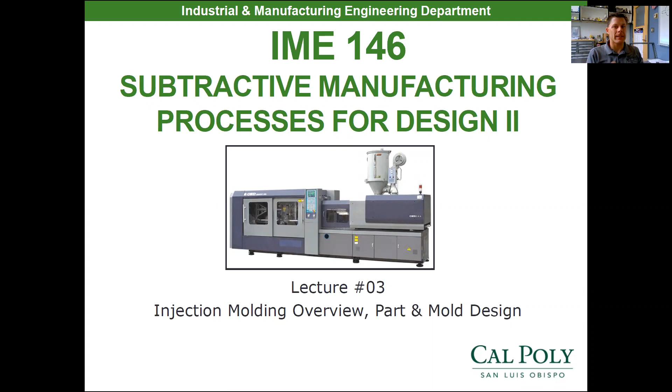This week, we're going to talk all about injection molding and how parts are designed and molds are designed. So injection molding is the most popular way to fabricate plastics or polymers. Materials engineers get upset when I call them plastics.

So out there, really, there's 3 different types of polymers, and really the determination of the manufacturing process depends on that type of polymer. So we're going to deal with thermoplastics with injection molding. What thermoplastics do is they heat up to produce a nice soft, formable, solid, or liquid when we're actually injecting them. Now, a thermoplastic can be remelted over and over.

So what can happen is I can go ahead and reuse some of the material from my gating system in my previous mold. I can chop it up. It's called regrind. And I can add the regrind material back into my virgin material and end up basically being able to reuse my plastics, because thermoplastics can be remelted over and over.

Now that's a little bit different than thermoset plastics. Thermoset plastics have a catalytic reaction occur when they're being polymerized, and the polymers cross-link when they're actually polymerized, and they cannot remelt. So thermoset polymers burn or char if you apply heat to them after they've actually been polymerized. So a bowling ball would be an example of a thermoset. You can't remelt the bowling ball, you'll just char it.

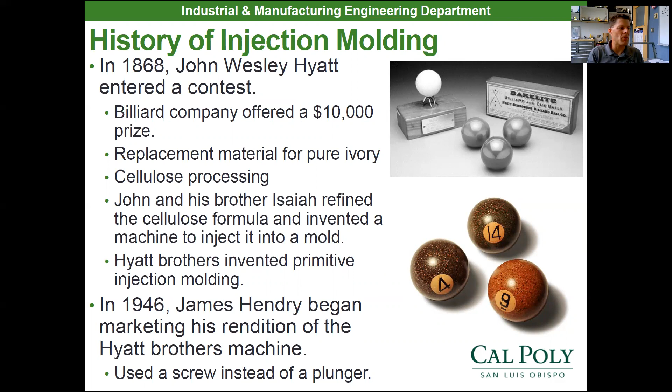So James Hendry began marketing his rendition of the Hyatt brothers' injection molding machine, which used a screw to deliver the material instead of a plunger. And modern day injection molding machines now look a lot like James Hendry's machine. I mentioned injection molding exploded in World War II. So they were coming up with new polymer materials for the process and new styles of parts that they could injection mold.

Now, it seems like wartime stimulated a lot of innovation in manufacturing, to be honest with you. So what happened is they had a new process now, and they were coming up with new polymers, and the industry started to blossom or explode. So this video I'm going to first show you right here talks a little bit about injection molding, and then we're going to get into the different details of the process and learn about part design and how the whole process kind of works. So let's watch the engineer guy talk a little bit about injection molding.

Injection molding is the most common method for mass manufacturing plastic products. Examples include chairs, toys, cases for consumer electronics, disposable cutlery, and my favorite, Lego bricks. Injection molding was invented to solve a problem for billiards. In the 19th century, billiard balls were composed of ivory harvested from the tusks of African elephants. This devastated the elephant population, so a billiards manufacturer offered a $10,000 prize for a replacement for ivory.

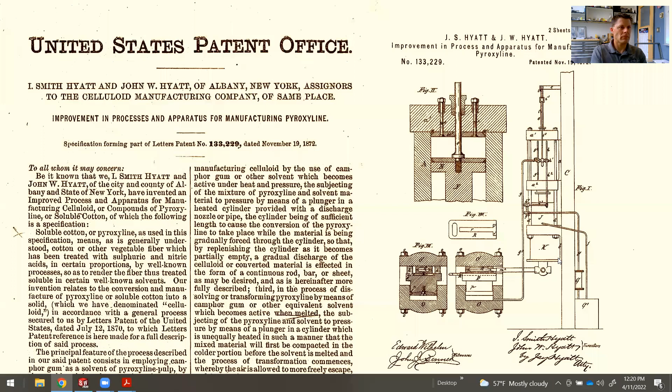And this spurred John Wesley Hyatt to develop one of the first plastics, celluloid, to create billiard balls. He patented an apparatus for molding products from celluloid. This apparatus was the birth of plastic injection molding. In principle, injection molding is simple. Melt plastic, inject it into a mold, let it cool, and then out pops a plastic product. In reality, injection molding is an intricate and complex process.

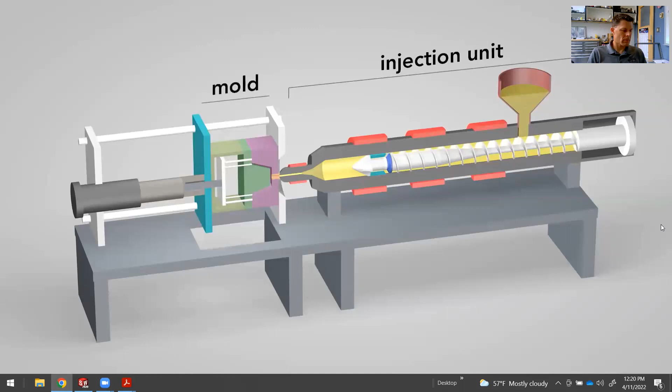An injection molding machine has three main parts: the injection unit, the mold, and the clamp. Plastic pellets in the hopper feed into the barrel of the injection unit. Inside the barrel, a screw transports the pellets forward. Heater bands wrapped around the barrel warm up the plastic pellets. As the pellets are moved forward by the screw, they gradually melt and are entirely molten by the time they reach the front of the barrel.

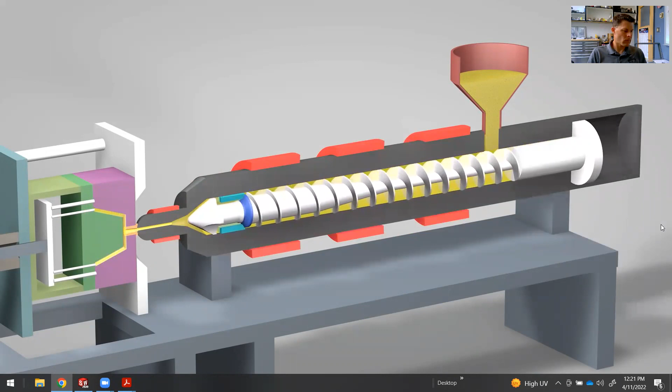Once enough molten plastic is in front of the screw, it rams forward like the plunger of a syringe. In a matter of seconds, the screw injects the molten plastic into the empty part of the mold called the cavity image. The plastic solidifies in under a minute. The mold opens and the part is ejected. The mold then closes and the process repeats. All injection molded objects start with these plastic pellets, which are a few millimeters in diameter. They can be mixed with small amounts of pigment called colorant, or with up to 15% recycled material, then fed into the injection molding machine.

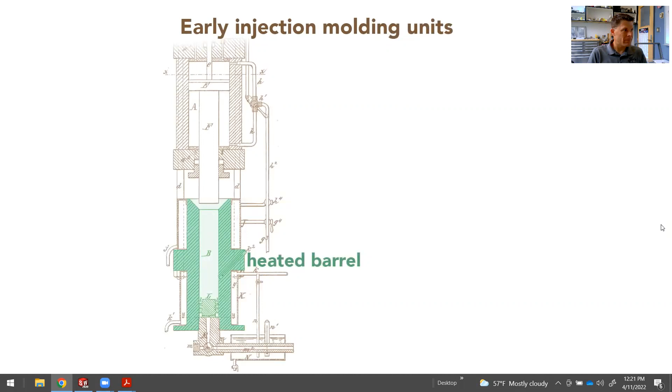Before the mid-20th century, injection molding machines used only external heating of the barrel to melt the plastic before a plunger injected the molten material. But because plastic conducts heat poorly, the temperature was uneven in the barrel. Either the middle was too cool and not fully melted, or the outer regions were too hot and degraded the plastic. The solution was this: the reciprocating screw, often regarded as the most important contribution that revolutionized the plastics industry in the 20th century. In the earlier plunger-style machines, plastic filled completely the cylindrical barrel. But as I showed you, the plastic was not at a uniform temperature.

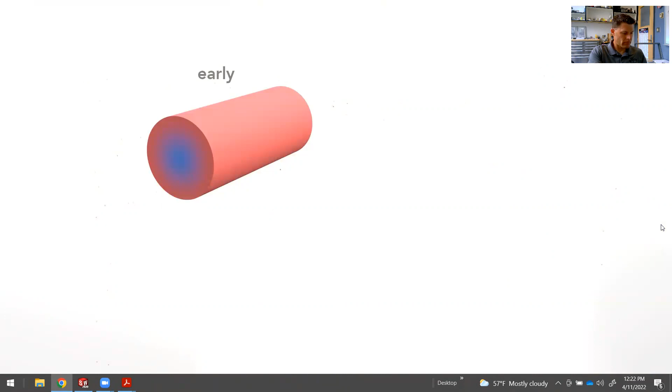The reciprocating screw overcomes this in three ways. First, in modern units, the plastic fills only the space around the shaft of the screw. This eliminates the cooler central region, leaving a thinner, evenly heated layer of plastic. Second, the screw has flights that wrap around the shaft. As the screw rotates, the flights transport the raw material forward through the barrel. The flights also serve to mix the plastic. The screw action agitates the melting pellets within the flights to create a uniform mixture.

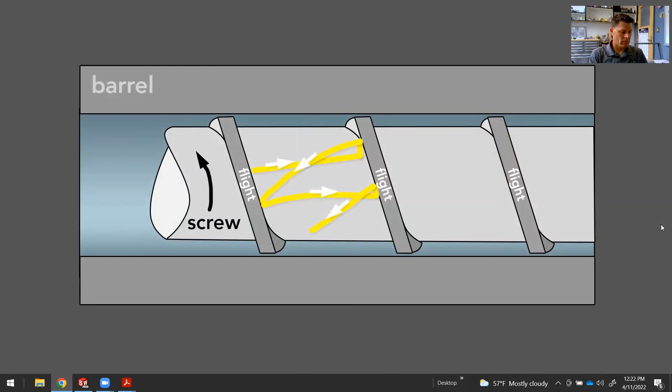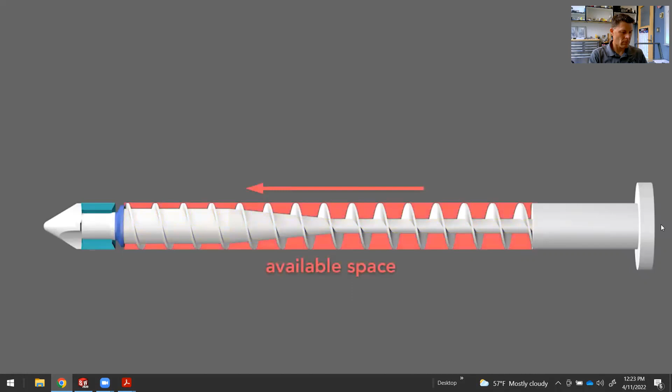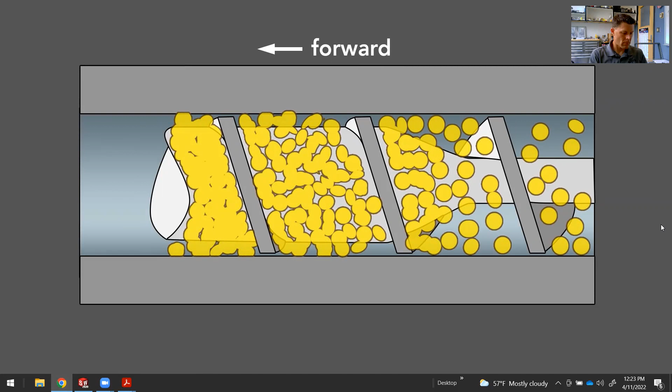And third, the screw action itself heats the plastic throughout. The shaft's diameter increases along the screw so that the distance between the wall and shaft decreases. The flights then squeeze out air as they move the plastic forward, and they shear the pellets and press them against the barrel's wall. This shearing creates friction and so heats the plastic throughout. This screw-induced shear supplies a majority of the heat needed to melt the plastic, between 60 and 90%, with the rest from the heater bands.

The molten plastic flows past the front of the screw through indentations or flutes. When there's enough plastic to fill the mold at the front of the screw, it rams forward like a plunger, injecting the plastic into the mold. The plastic cannot flow backwards because when the screw pushes forward, a check ring is shoved against a thrust ring to block the backwards movement of the molten plastic. This forces the plastic into the mold. Initially, the cavity image is filled with air. As the molten plastic is injected, it forces air out of the mold, which escapes through vents.

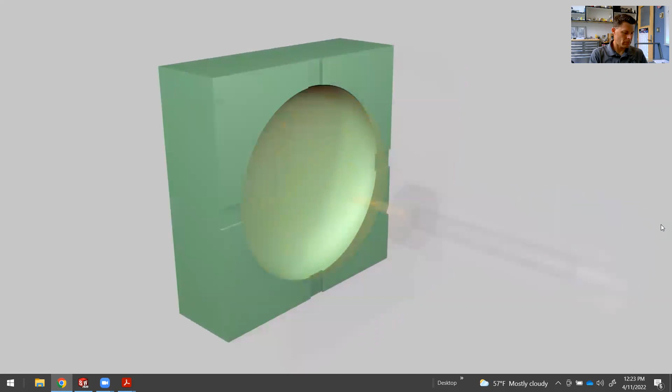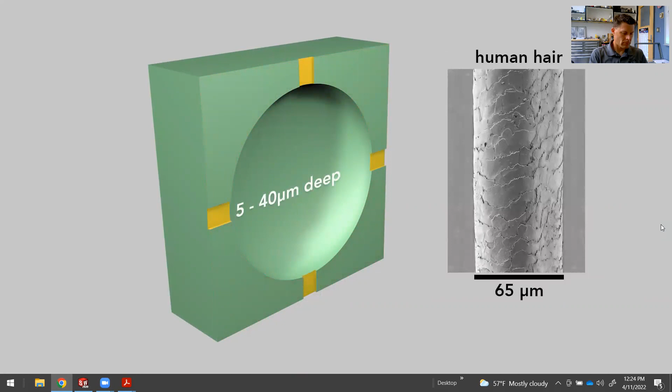These vents are channels ground into the landing surface of the mold. They're very shallow, between 5 and 40 microns deep. The plastic, which has the consistency of warm honey, is too viscous to flow through the narrow vents. To speed the plastic solidification, coolant, typically water, flows through channels inside the mold just beneath the surface of the interior.

After the injected part solidifies, the mold opens. As the mold opens, the volume increases without introducing air, which creates tremendous suction that holds the mold together. So at first, the mold slowly opens several millimeters to allow air to rush in and break the vacuum, and then the mold quickly opens the rest of the way so the part can be removed. These precision machined steel molds can cost hundreds of thousands of dollars.

Removing the part from the mold can be difficult. When the plastic cools, it shrinks and so becomes stuck tightly on the core half of the mold. Molds have built-in ejector pins that push the part off the mold. The ends of the pins sit flush with the core half of the mold, but are not perfectly aligned. Sometimes they protrude or are indented slightly. So, if you look closely, you will see circular ejector pin witness marks on molded products. For example, this chair, on its bottom, has an array of witness marks.

When the part drops from the mold, an operator has to remove the sprue, that section of plastic that connected the injection unit to the mold. Sprues are manually twisted or cut off the part. Sprues are attached to objects only in molds that make a single part at a time, like a chair. Smaller objects are made in multiples in a single mold.

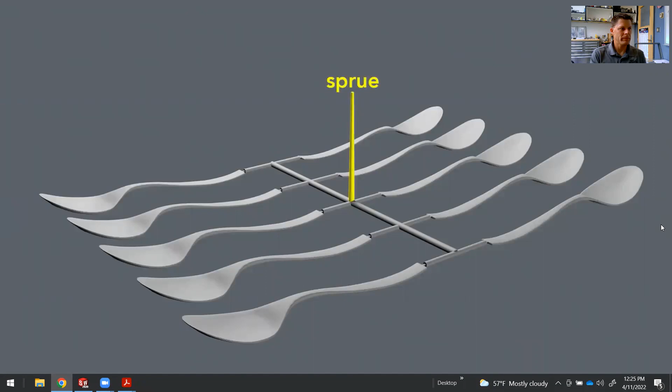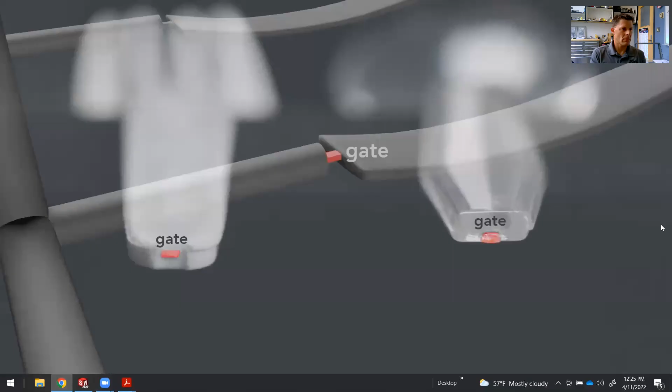In these, the sprue connects not to the part itself, but to a network of distribution tunnels called runners. The runners fan out from the sprue and connect to each cavity in the mold via a small, typically rectangular, entrance called the gate. You can see the gate on plastic cutlery. The parts for model planes typically come still attached to their runners.

Molds always have at least two parts, and where the parts of the mold meet is called the parting line. Here on this piece of cutlery, you see the parting line along the side of the fork. When mold halves close, they are never perfectly aligned, nor do they have sharp corners. This creates a noticeable parting line on the molded object.

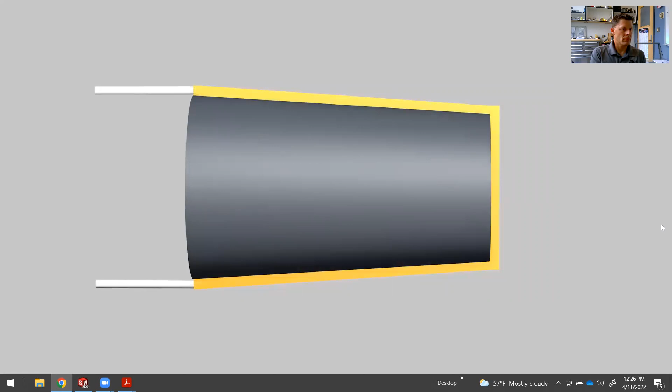Another very important aspect of mold design is the draft angle. If a part has walls that are exactly 90 degrees, it will be very difficult to eject because its inner walls will scrape the core half of the mold. Also, the vacuum will be difficult to break because air cannot readily enter. However, if the walls are slightly tapered, even just 1 or 2 degrees, it becomes much easier for the part to be removed because once the part moves slightly, the walls are no longer in contact with the core half and air can rush in.

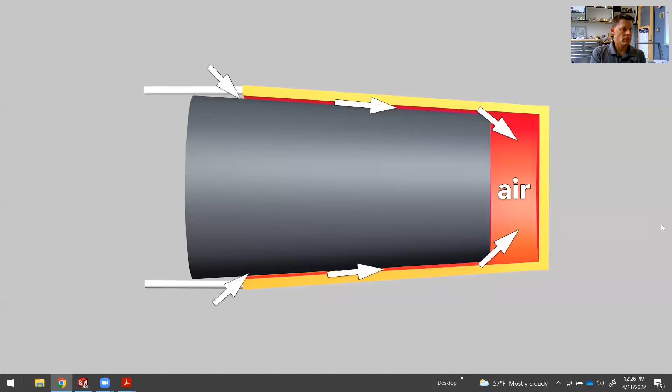One impressive example of injection molding is the Lego brick. You can see the injection point in the middle of a stud, but this is not from a gate or a sprue. The Lego molds use hot runners. Hot runners are a heated distribution network. This keeps plastic inside the runners molten while the plastic in the mold solidifies. This leaves no gates or sprues to be removed. The molded bricks are ejected, ready to use. The downside is that this setup is more expensive than a traditional cold runner system.

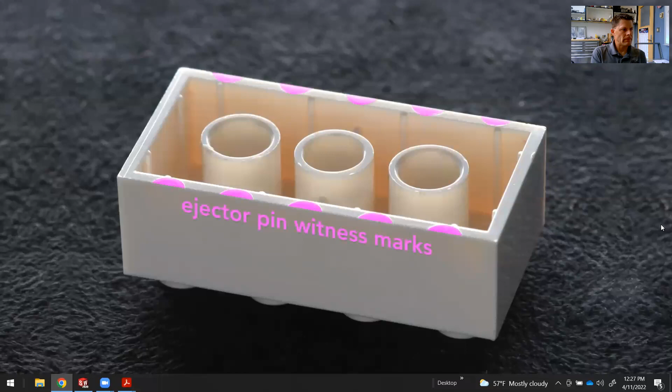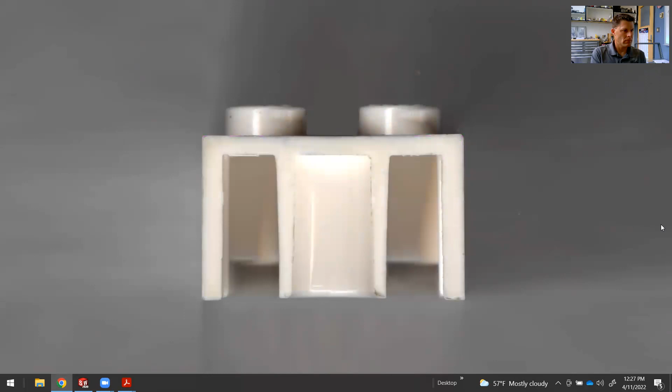On the bottom edge of the brick, you can see ejector pin witness marks. And what's most clever to me is where Lego designs their draft angle. The outside of a Lego brick must be square. So if you cut a Lego brick in half, you can see that these inner supports are thicker at the top than at the bottom. There's a draft angle of about 1.5 degrees. This helps the ejector pins push the brick off the mold. The core half and the cavity half of Lego molds are designed so that the parting line is at the bottom edge of the brick. This hides the parting line.

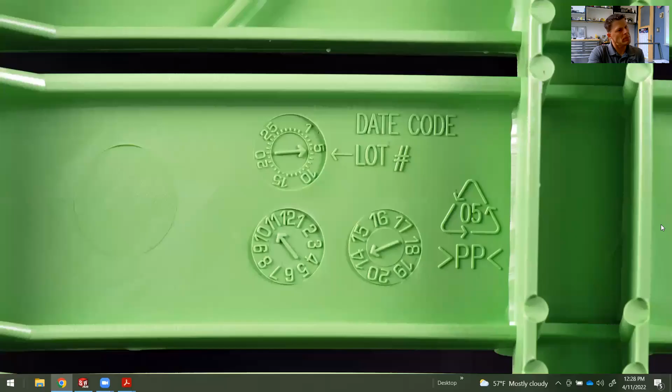Look around you and see how many injection molded objects you can find. Likely the device you're watching this on has injection molded parts. You should be able to find ejector pin witness marks and parting lines, but you may find something like this. It's a date wheel that shows the month and year the item was made. These are created by removable inserts and can be changed out for each run of the mold. They're very useful for tracking down defects.

So to return to where this all started, John Wesley Hyatt and his injection molded billiard ball did not win the $10,000 prize. His celluloid billiard balls didn't bounce quite right. But he did pioneer plastic injection molding, a thriving, continually evolving manufacturing process which creates many billions of products every year.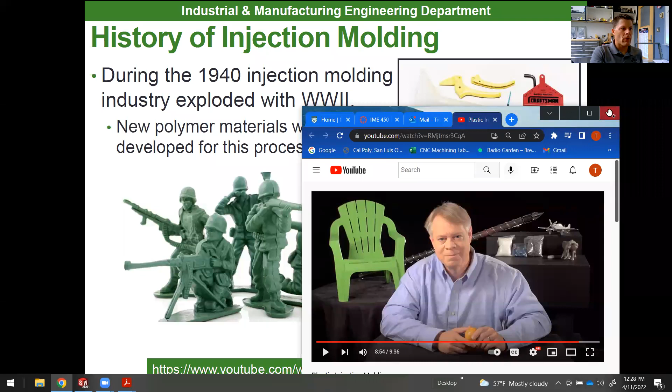All right, so I thought that was a really good overview of injection molding. If you think about it, a lot of different products out there are injection molded. So it's the most popular process for manufacturing thermoplastics. That's why we're talking about it in IME 146.

And that injection mold has been machined. So we're going to talk about some advanced machining processes starting next week, like electrical discharge machining, electrochemical machining. But these advanced machining processes allow us to produce intricate details for molds. And we'll see how those work a little bit next week. But for this week, we're going to focus strictly on injection molding.

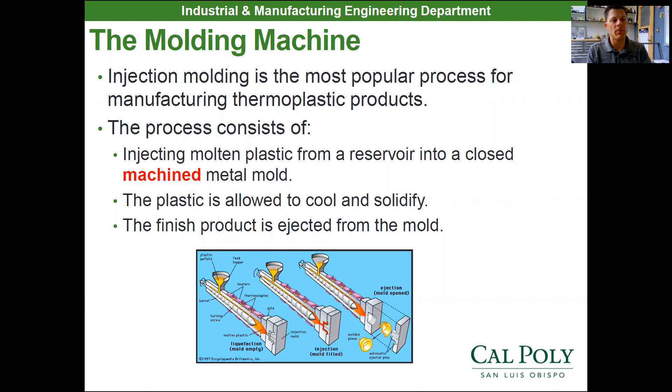So once that mold comes shut and we inject polymer or plastic into it, it solidifies, and then the molds open up and the product's ejected from the mold automatically. Most injection molding machines run automatically, so the parts are automatically placed in the bucket after molding. Our injection molding machine is like you see right up here on this slide.

It's called a Morgan press. Its retail value is about $15,000 if we were to buy a brand new one. And the Morgan press uses a cylinder and a piston to inject. So it's like the original Hyatt Brothers machine that you saw in that original patent. We're not using a screw to deliver the material. We're using a big plunger.

So our machine isn't made for high volume production. It's not made for automatic molding. It's made for more prototypes or smaller parts, where you're not going to be producing 10,000 of the same part. You may be producing 50 or 100 parts, smaller production runs, smaller molds.

And what we're going to be making are these Geneva handles like you see right here. And then we're going to drill and tap them and see what the runout is on our Geneva handles. So a little bit of injection molding, a little bit of GD&T this week, some drilling and tapping, some fun stuff coming up in lab.

But let's look at this Morgan press machine right here. You're going to see all the controls are on the bottom. The bottom's got clamp control and injection control. So there's really two main features on an injection molding machine. The clamp, which clamps the mold together, and that clamp has to withstand the injection pressure.

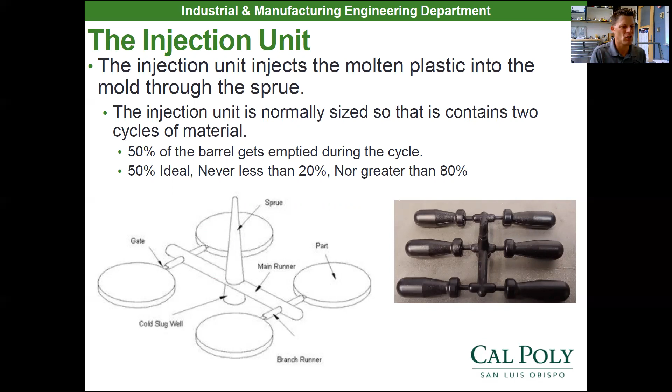Now, that injection unit has a couple of different pieces that go in there. In a real machine, you have a barrel, which is part of your injection unit. The barrel has a reciprocating screw in it and different electric heater bands to melt that material. It's composed of a tool steel liner, and then it has either a screw or a plunger going down the center. The press we're using has just a pneumatic plunger, so we have basically a large pneumatic piston that pushes down on the melted plastic and injects it into the actual cavity of the mold.

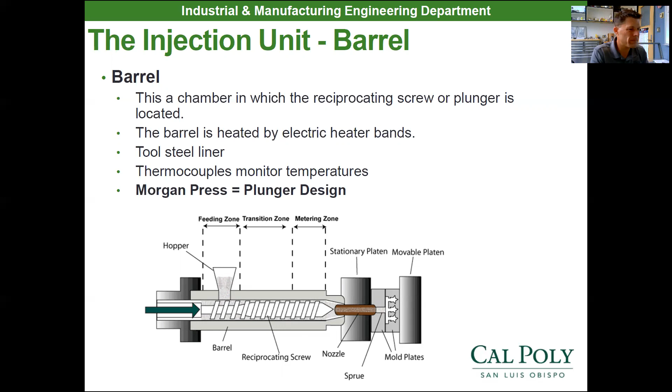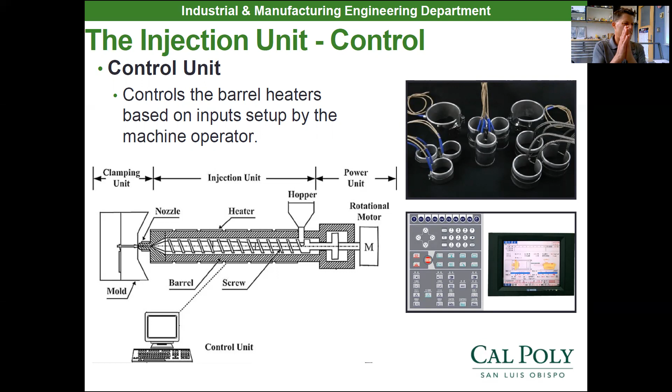Now, there's a control unit or a computer system that looks at something called a thermocouple. A thermocouple senses temperature. So the thermocouples in the heater bands and the control system allow it to turn on and off and stay at a specific temperature that's really close to the melting temperature of the material. Because remember, it doesn't actually melt till it gets to the nozzle. So the control unit keeps the barrel at the correct temperature, and it allows you to open and close the press during the cycle.

Now, the hopper is where you keep the plastic or polymer pellets. So thermoplastic material is loaded into the hopper. Now, materials like nylon really like to absorb water. So there's a lot of polymers out there that absorb moisture from the air.

And the problem is when we get the moisture from the air absorbed into our material, we heat our material up above 220 degrees Fahrenheit. So water at 212 degrees Fahrenheit turns into steam, right? And if we have any type of steam, it's going to be trying to expand in our barrel, and we're going to have some issues. So if you hear any hissing or popping out of your injection molder, you probably have some steam going on there, and it's not going to give you desirable results.

So real production injection molding machines have a dryer on the hopper in order to always basically aerate or dry out the material as it's sitting there in that hopper, so we can get rid of that moisture. What we do is we put it in the oven at 225 degrees Fahrenheit and let it bake, and that bakes the moisture off of our material. Then we can go out there to lab and basically spoon it into our actual hopper in our machine. So dryers remove the moisture absorbed in the actual polymer materials.

Now, the injection unit is a screw on most machines. And so it goes from that hopper down into the screw. It gets fed into the backside of that screw, into the feeding zone. The transition zone starts to compress the material, giving it a little bit of shear. There's some shear stresses going on in there as we're compressing the material, and that's creating heat as well. So in that transition in the metering zone, we're using the frictional shear force to heat it up along with those heater bands. And then right at that nozzle, it should melt and inject right into your actual cavity of your mold.

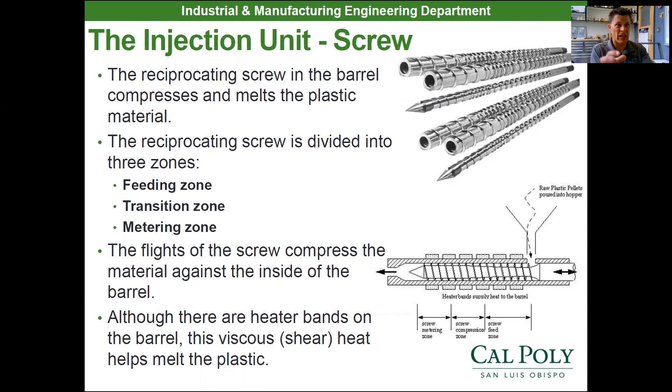Now, most injection molding machines have a spherical radius for their bushing. So looking right out here on my mold, that's a spherical radius. So it's a radius in the form of a sphere. There's a hole, so it goes down into the actual cavity of the mold. Let me show you the mold here. Open that back up. So you can see on the opposite side of that sprue bushing is the actual reverse taper sprue that'll feed the mold, and then the gates and the runners right there.

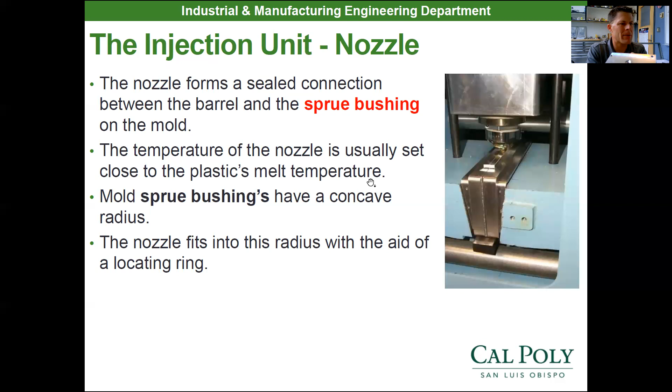So the nozzle comes in and attaches itself to the top of the mold. Pressure's placed on that. It's got that concave radius, and it doesn't allow plastic to leak out. This way it goes out down into the actual mold, the path of least resistance right there. So the nozzle fits into that radius with the aid of a simple locating ring.

Now, once the mold's together and clamped and the nozzle's up to it, you have to set the injection pressure on the machine. Injection pressure is really rated off of how viscous is your material and how big of a cavity do I have to fill. Do I have to fill a large cavity? Do I have to fill a really thin cavity? What do I got? Do I have a lot of passageways that might need a little bit higher temperature and higher pressure in order to fill them? Just really depends. So our press has 12,000 PSI max injection pressure.

And to be honest with you, we're running 6,000 PSI. So we have 60 PSI injection pressure right there, which is proportional based off the machine's 12,000 PSI. So we're running about 6,000 PSI injection pressure, just so you know.

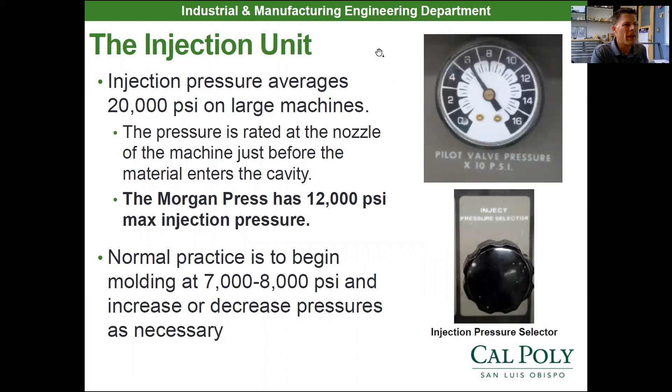Normal practice is to begin molding around 7,000 or 8,000 PSI, and you decrease or increase based off your results on what's filling in the mold right there. Is the mold filling or is it not filling? If it's fully filling, you can keep decreasing till it doesn't, and then add a little bit more pressure so it fills again. But that's what the injection unit does. So you have a little needle control valve down there that you twist, that adjusts how much injection pressure we actually have.

But when in doubt, don't ever max it out, because you can actually hurt the molds by clamping them too much. So you want to match your injection pressure and your clamping force so that your injection pressure doesn't spread out your molds when you inject.

So that's all it really is there, to keep it together. So you have one nice congruent mold cavity that's together. It doesn't want to spread apart when you add that 8,000 PSI or 6,000 PSI into the cavity there. So that's what the clamping unit does.

Now, materials are classified by their flow. There's high flow, average flow, and low flow materials. It's basically a number 5 to 20, where 5 flows the lowest, and 20 would flow like water, or close to that. So based off the amount of flow, you might have to give it a little bit more clamping pressure when we have low flow materials.

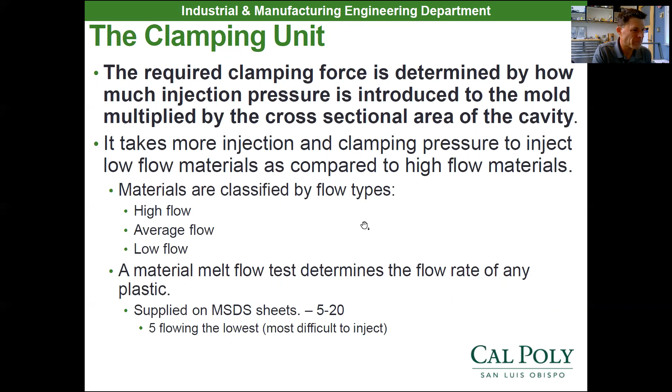Now, how they actually figure out the clamping force is they multiply the projected area by 2 to 8 tons. So low flow materials use 8 tons, high flow materials use 2 tons per square inch. So if we have a low flow material, we would use 8 tons per square inch of our projected part area, and then we add a safety factor, and that's where we set our clamping pressure so the injection pressure doesn't actually spread it apart.

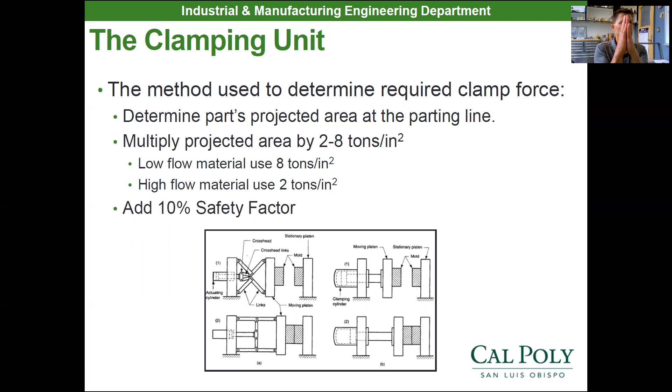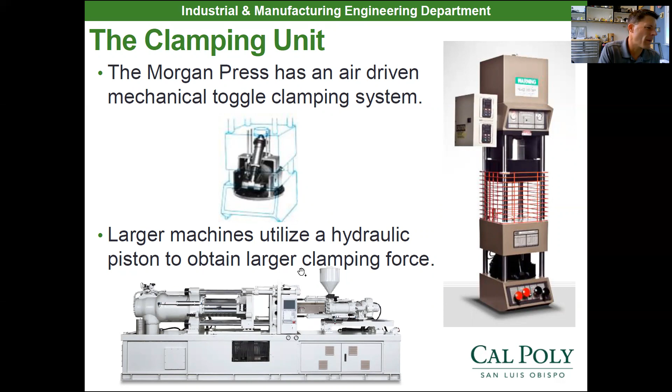So you can see our clamping unit, when you look at the Morgan Press in lab this week, is a toggle joint. So the toggle joint comes up over center and it's ready to go. A production injection molding machine uses a large hydraulic piston. So what we've got right here is a large hydraulic cylinder, and the area of the cylinder multiplied by the hydraulic pressure gets us our amount of force for clamping.

So with that clamping unit, you're wondering, why don't we just clamp it as much as possible? Well, if you use too little clamp force, the mold's not going to stay closed when you inject plastic into it. So it'll flash, and that flash won't look good, or you might not fill parts if it opens up because it wasn't able to flow into that cavity.

If you use too much clamping force, you can damage the injection mold or crush the mold material and cause a very expensive repair or impossible to repair scenario. Or you could even damage the molding machine if you slam it too fast, too close with too much force. So those are the consequences of improper clamping pressure.

So what we've got here is kind of an animation. Let me turn off the sound of really what's going on right here. One second, let me just turn this down. So we have this box. If you'll notice, we have our tool. These are going to be ejector pins that pop the part out afterwards. They have the full mold right there.

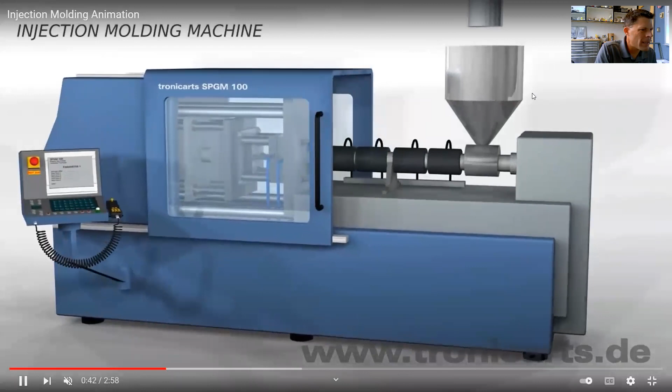So the way it works is you get your beads. They go in the top of the hopper, right? So we kind of know how this works. We put our beads in there. We put any colorant in there that we need. The hopper is going to dry it out and get rid of all of the moisture that could be in that material. So once it's dried, it goes into that screw or that auger.

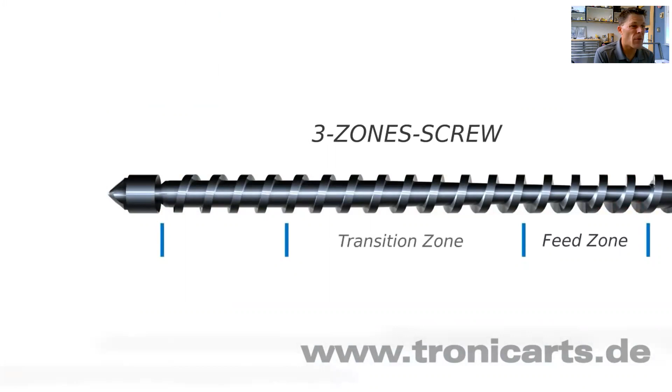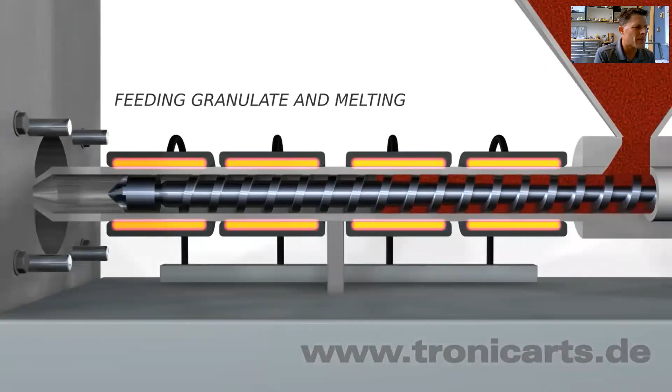There's 3 zones in the screw. There's the feed zone where you first drop it in from the hopper, the transition, and the metering zone. After the metering zone, it goes into that non-return check valve. So the granules start to melt and melt and melt. They're not melted until they get up to that metering zone right above the check valve. So on the left-hand side of that check valve is where it's melted. Now at this point, the screw is going to plunge.

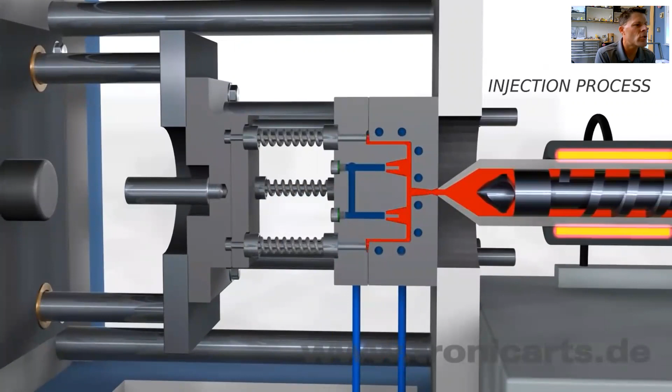The molds in the high production machines are cooled. So there's cooling channels in there to keep the mold at a constant temperature. Otherwise, over time, that steel mold will heat up to the same temperature that it's injecting at. So it injected it, it held pressure on the mold while it solidified, and then it opened the mold, and the ejector pins pop the part out.

And then it'll continue to do this automatically. These injection molding machines are automated machines that automatically mold your parts. You don't really have an operator standing in front of it, pushing buttons like we're going to do on ours in lab.

So that's the full process right there of injection molding. Now, that temperature, how they actually take temperature, they don't just believe the thermocouples in the barrel. They do what they call an air shot.

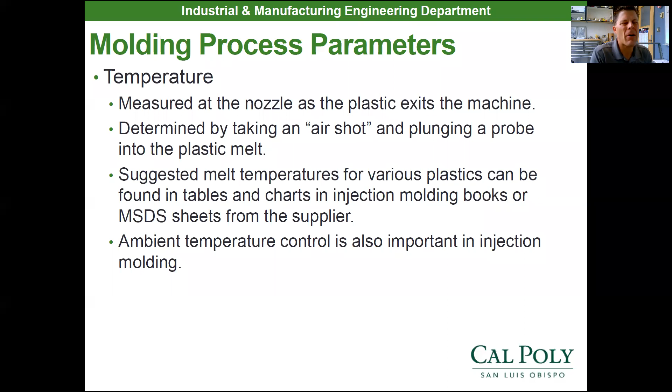So in the material safety data sheet for the specific material you're molding with, it'll have the melting temperature on there. So you set it very close, you inject, and the second it comes out of the nozzle, you put a temperature probe in there in that air shot, and that'll tell you how hot it is actually coming out of the nozzle. And you can adjust based off that. So they actually do a real temperature check with an air shot.

Now, on our injection molding machine in lab, we can control temperature in 3 different areas. Number 1 in the barrel, that's where we don't want it to melt. Then we can control it in the nozzle, that's where we do want it to melt. And then because we have aluminum molds, we actually have to keep our mold hot, or else it's going to cool off so quick and it would do a cold shut.

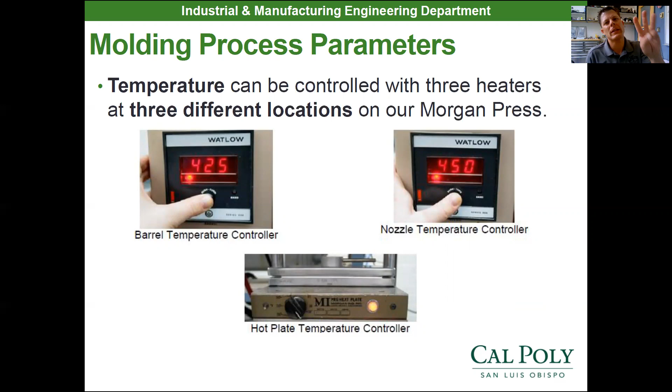So what a cold shut is, if we inject our material into the mold and it hits the cold surface of the mold, it might end up solidifying before it actually fills the entire mold. So we have a hot plate that we keep at 200 degrees Fahrenheit. So our mold is always 200 degrees. The material still solidifies in that 200 degree mold. So we can control temperature in 3 different locations right there.

Now, the pressure, if we go ahead and just max out the machine on injection pressure, we're going to get flash around the parting line. So flash is a thin layer of plastic that went outside the mold cavity where the 2 halves of that injection mold meet. So you can actually ruin a mold if you flash over many different cycles. Over time, it starts to flex the mold or wear the mold out where the plastic is leaking out of the mold. So you can actually hurt a mold by flashing it too many times over time.

That's why you really want to control your injection pressures, and we use math to figure out our injection pressure. We don't just kind of guess. We use simple math, like I explained before, with the pressures and the cross-sectional area of where we're at in our parting line, or the sectional area.

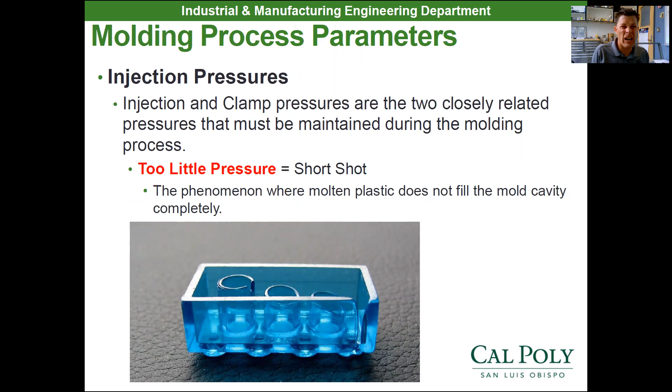Now, if we just crank it down and didn't give it enough pressure, we get what we call a short shot. So that's where the plastic doesn't actually fill the mold cavity completely. And we end up with an unfilled part, an unsellable part, or an unusable part. So that's too little pressure.

Now, if you think about it, there's our mold. There's our old mold down there at the bottom. Remember we were going to use the 2 molds now, the new ones I made this year. But when we're talking cycle time and making thousands of parts, you got to think of all these different variables as part of your cycle time. You got to think about the time it takes the mold to close. You got to think about the time it takes to inject the plastic into the mold.

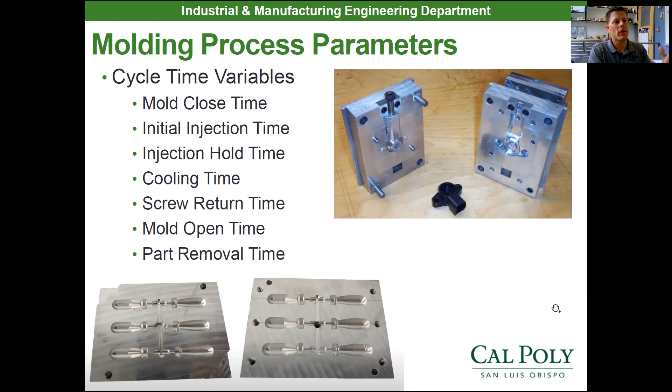Now what I'm going to do to end today's pre-lab, so you can get out there and start designing plastic parts to be moldable, I'm going to talk a little bit about injection molding part design. So really the most common failure in injection molded parts is stress.

You can actually mold stresses into the part by bad part design. So if the part cools too quickly, or if it's under excessive pressure during cooling, it solidifies in a stressed manner. So if you solidify with internal stresses in your part, you're going to have problems when it actually goes to take the loads later on, because it's already stressed out.

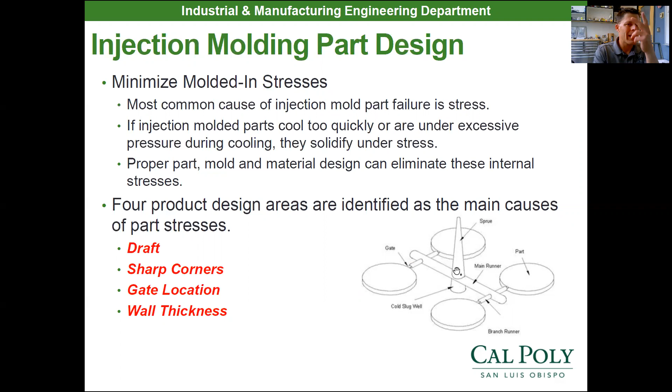So proper part and mold design can help eliminate some internal stresses. So really the 4 areas we talk about in part design are draft, sharp corners, gate location, and then wall thickness. So number 1, the video talked about draft. When you go to pull the part out of a mold, you will get suction if you don't have any draft on your surfaces. You basically have drag on the wall, frictional drag, and you also have suction from having a vacuum in there.

So the deeper the draw of the part, the more draft is needed. So the deeper the part is, the more degrees of draft you need. For injection molded parts, they're usually drafted, or they have an angle for their vertical walls, about 1 to 3 degrees. All molded parts on injection molded machines have some sort of draft angle to them. You can get down to as little as 1/4 degree of draft, although that might still be hard to eject the part. Usually they're about 1 to 3 degrees on injection molded parts. So start looking around at the plastic parts that have been molded, guarantee they have draft away from the parting line somewhere.

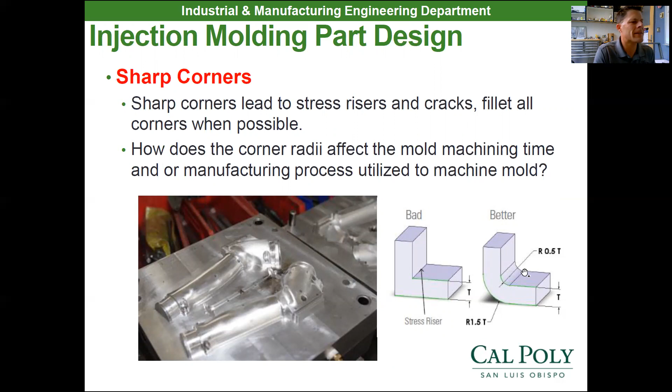Now, another thing that would cause stress in plastic parts or any types of parts are sharp corners. Sharp corners lead to stress risers and cracks. It's hard to machine molds with sharp internal corners too. The corner radii affects mold machining time, it's going to take a little bit longer to mold, and it doesn't flow as well. And when you go to absorb the amount of stress that's in the part, you're probably going to get a tear in that sharp section. So you make nice generous fillets and rounds instead of sharp corners on injection molded parts.

Now this is more in gate design. When you're designing a mold, you always want to gate into the thickest cross section that part has. You want that thick cross section to solidify last or freeze last. So you gate into the section that freezes last. It's heat transfer. It freezes from thinnest to thickest section, so the thickest sections freeze last. That's where you want to gate into.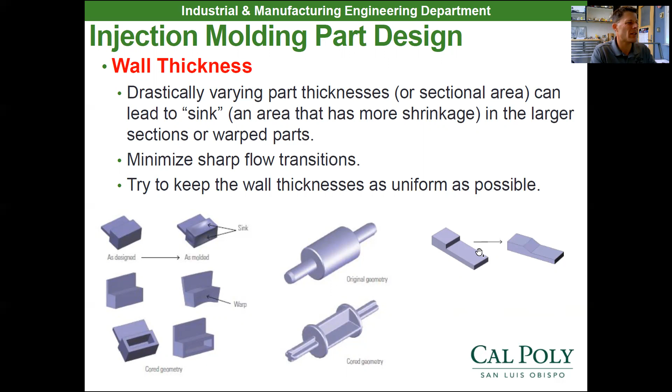You like to keep the wall thicknesses as uniform as possible throughout your injection mold designs. And if you have sharp transitions, you try to do them with an angle. So instead of having a sharp corner like this, you smoothly transition from one thickness to the other. That way you don't have drastically different cooling, which is going to cause molded-in stresses. If one piece freezes at one time and the other piece is still molten, you're going to end up having molded-in stresses because they didn't cool uniformly across the part. So wall thickness is a big thing, and uniform transitions. Don't have sharp flow transitions.

So there's a video link right here if you wanted to watch Brian, our lab tech, inject the Geneva wheel handles. I'm not going to show that right now. I'm going to show you how we design the mold in SolidWorks. You're going to get a chance to use the injection molder on your own or in teams of 2 in lab in week 3, and you're going to end up making these handles.

And then these handles, let's look at the engineering drawing. These handles are going to get turned into this Geneva handle drawing from our assembly drawing. So we're going to mold the raw material. Then in lab, you're going to face, center drill, and tap the thread into the part. And that thread now becomes our datum. If you look at this drawing, the A datum is the 1/4-20 thread.

So everything spins around that thread if you think about it, where it attaches to the Geneva wheel in the assembly. Therefore, that's our datum. So part of this design is we didn't want the handle to be overly wobbly as it spun around on the Geneva wheel, on the Geneva drive wheel. So what we ended up doing is we put a run out tolerance to the A datum on this handle.

So what you're going to end up doing is you're going to mold the part. You're going to put it in the lathe and hold it in the collet chuck, and you're going to make the thread in it and qualify that A datum, the thread. You're then going to take it out of that collet chuck and put it into an inspection fixture where you hold it by the A datum or you thread it onto the fixture.

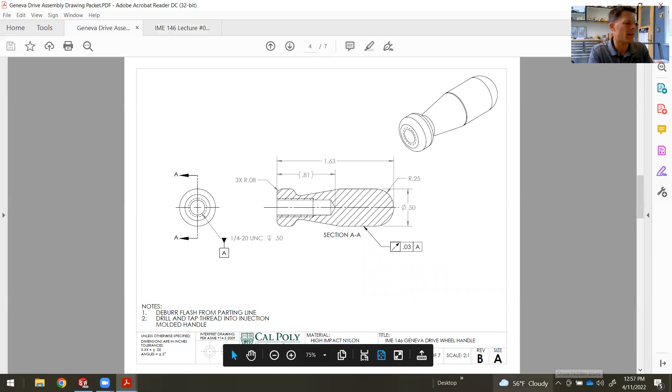And you'll have a first article inspection to inspect it afterwards using the optical comparator and the actual lathe for the run out. So you'll inspect run out and then a couple of these radii and then diameters and lengths on the optical comparator. And then we'll have another part done for a Geneva wheel assembly. And week 4, we'll come back and actually use the cast acrylic and we'll laser cut that cast acrylic Geneva wheel. So that's the part.

Let me show you SolidWorks real quick. Here's the part in SolidWorks. So you're all probably learning SolidWorks or maybe Fusion. Fusion does the same thing. But what I thought I would do is show you how I made the molds or the mold cavity based off my SolidWorks part. So I know you're in SolidWorks class at the same time.

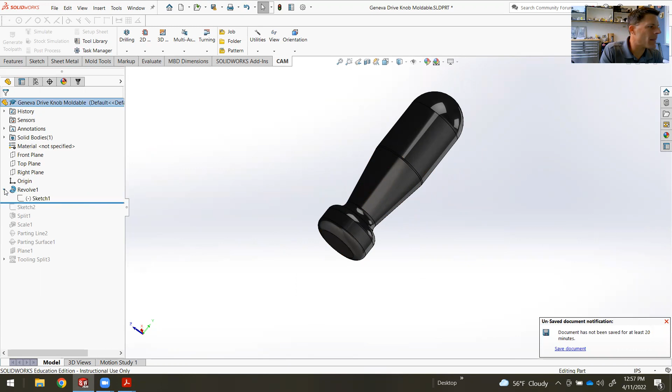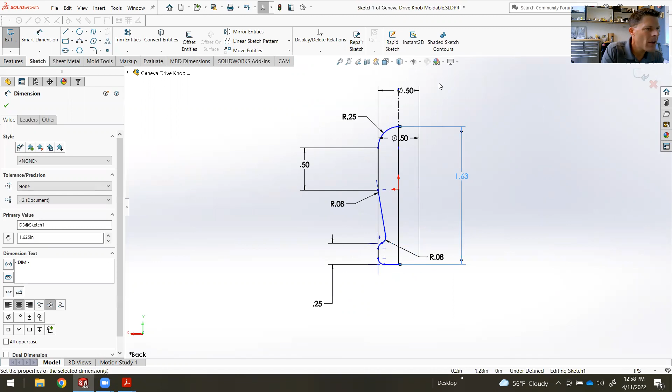So how I actually made the handle is I revolved a sketch. Let me go the other way real quick. I literally created this sketch right here, 80 thou radius, they're typical. It's basically got a 1/4 inch bottom piece, a 0.5 flat right there, 1.625 overall length, 0.5 diameter. So I basically did one feature. It's called the revolve. You should have learned revolve by now in 130. Definitely probably should have. It's week 3.

So at this point, after the revolve, I went ahead and I split it right down the middle of my part. And then I scaled it. Why I had to scale it is plastic shrinks as it solidifies. You can actually see how much it shrunk when you go to try to put it back in this mold. You can see it's a little bit smaller, ever so slightly. You'll see that when you go to make yours.

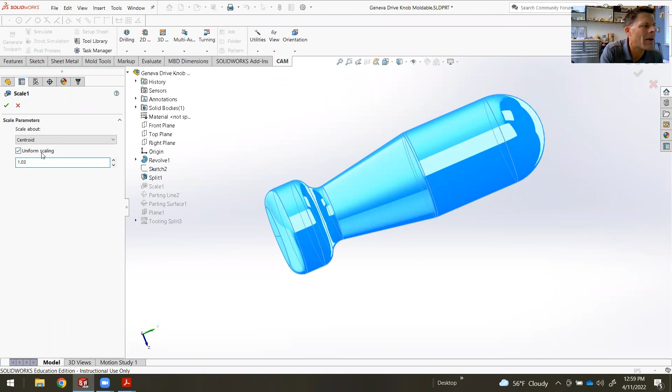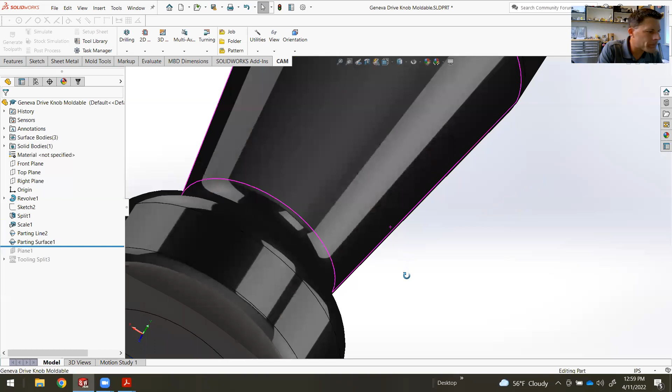So this alloy of nylon, this is Bidyne, shrinks about 2%. So what I did with my scale tool right here is I scaled it up 1.03. It shrinks about 2.6% is really what it is, so I rounded up to 3 on my scale. So I scale it. Then I decided exactly where I'm going to part it, right down the middle of the part. So it's been parted. At this point, I generate what we call a surface model or a parting surface to basically show my part.

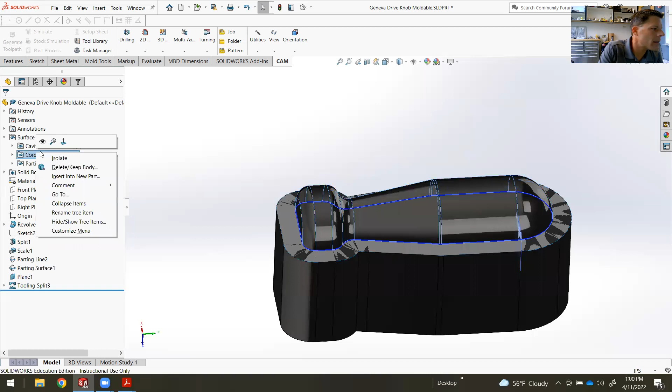Now, let me show you this real quick. We'll show the parting surface. So I created a parting surface of where it's actually going to split in the mold. At that point, I went ahead and created what we call a tooling split. What the tooling split does is it creates a couple of different pieces here.

Let me actually hide that. Let me do that. The tooling split actually creates the mold cavity right there. So now I've actually got this mold cavity right here that I can go ahead, right click, and I can insert that into a new part. When I do, sure. I'm just going to do that real quick. It gives me the mold cavity to make the part.

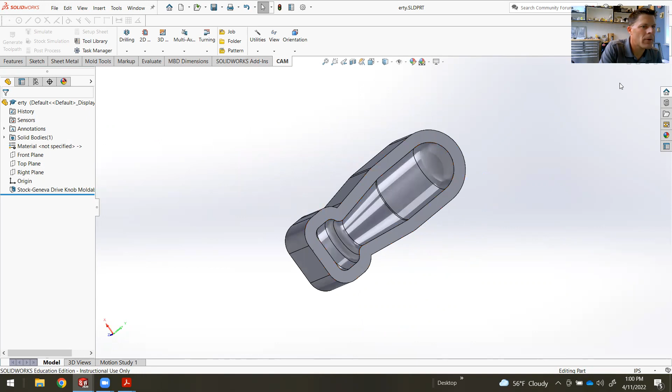So what I did with the mold cavity at that point, let me go ahead and close this one down because I don't need this anymore. What I did with that mold cavity is I ended up creating, let's see here. Let me go find this assembly. I guess going to the right class would help, huh? Right there, week 3. It's in the lab manual. Give me 1 second, I'm just trying to find a file. Geneva wheel, mold B.

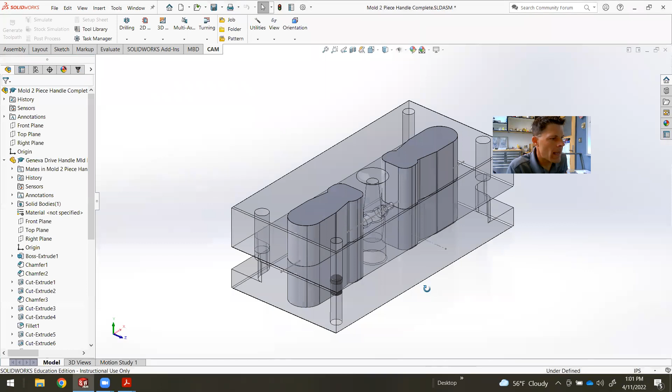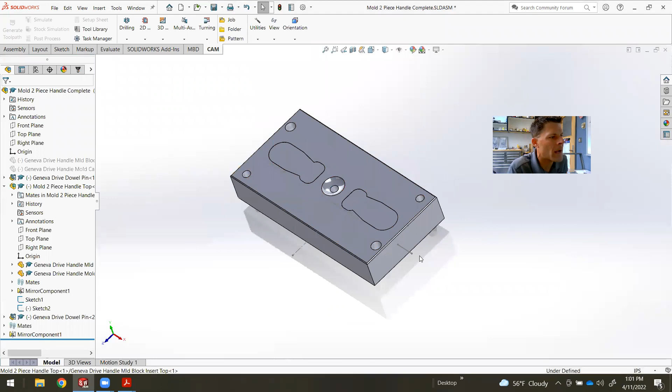What I ended up doing then was I took that cavity and I made a full tooling set. So if you look, let me go here to change transparency. Suppress, suppress, suppress. So I made that mold cavity into an actual mold that would attach to the machine. I put the threads on it, the nozzle, basically the round cutout for the nozzle. I made the gates and the runners, and then I made both sides of the thing too.

So unsuppress that thing, unsuppress that thing. Give me 1 second. Right click, change transparency. Still got one more thing suppressed. Where is it? Well, either way, what we got is basically our mold halves and our dowel pins.

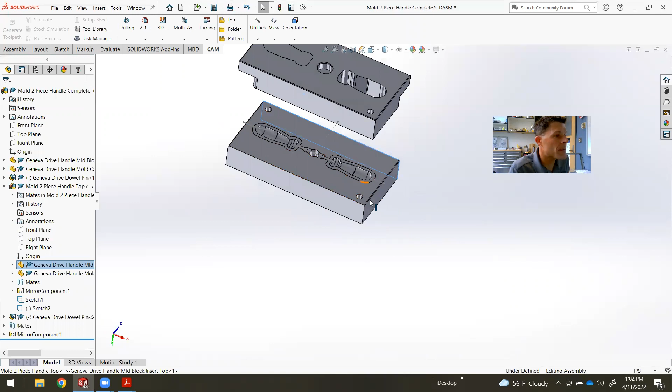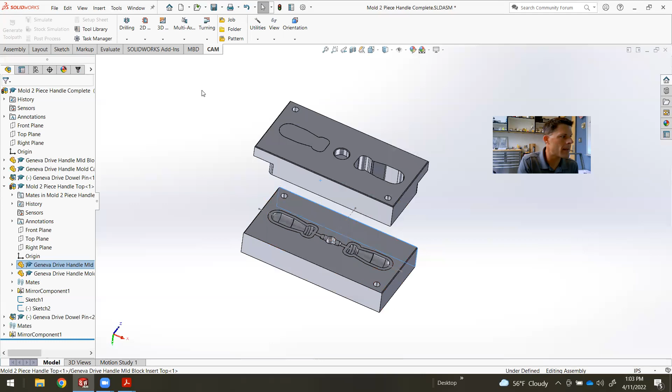What I'm getting at is there's specific tools in SolidWorks designed to create molds. You can create parting lines, you can create shutoff surfaces, you can create the tooling. So literally you design your part, you scale it up to what you need it to be for the shrinkage, and then you design your mold based off that. That's really how our molds were made. Then I used the CAM system to cut them out, and we put them on our machine. That's how we use the mold tools in SolidWorks.

Now on Canvas, you have a mold tools tutorial video I put up there, if you're interested in learning more about how SolidWorks mold tools work. Let me show you that real quick, and then we'll call it a day and you can work on your assignment in lab. So here we go, 146. In week 3's injection molding module, I put the SolidWorks mold tools overview. That tutorial will show you how to use all the mold tools. This week in lab, you're going to have an injection molding timed quiz, just like last week.

After you watch this pre-lab video, you should be ready to take this timed quiz. That'll be due by the beginning of lab 4. You'll also have an in-class assignment. I believe it starts on page 145 of the lab manual. 145 and 146 are done in class. 147 is the first article inspection. So you'll do the in-lab assignments, then the first article inspection, and turn that in by the end of lab or by the beginning of lab 4. So there's really 2 major things, an in-lab assignment and the quiz from this pre-lab video.